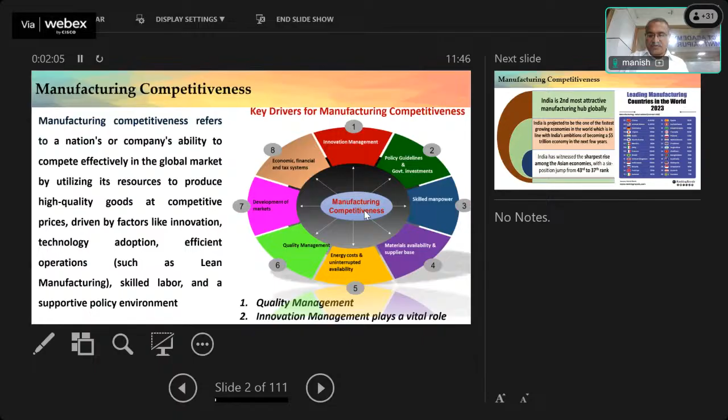A few case studies on where India stands. India is the second most attractive manufacturing hub globally. Among the leading manufacturing countries in the world, India stands fifth. India is projected as one of the fastest growing economies in the world, in line with India's ambitions of becoming a 5 trillion dollar economy in the next few years.

This is the way India has been growing over the last 10 years. Looking at the biggest manufacturing economies, after China, USA, and Japan, India is in the fifth position. So it is one of the greatest, fastest growing economies in the world.

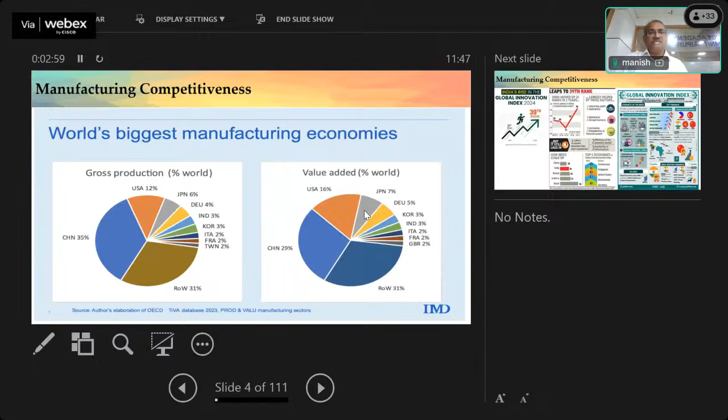Another indicator is the Global Innovation Index (GII). India is now ranked 39th, whereas 7-8 years back it was in the 70s. It has improved over the last 10 years because of the promotion of a lot of startups in the country, moving up to rank 39. The Global Innovation Index is calculated based on parameters shown here: education, number of institutions, infrastructure, market, and everything together affects the global innovation index.

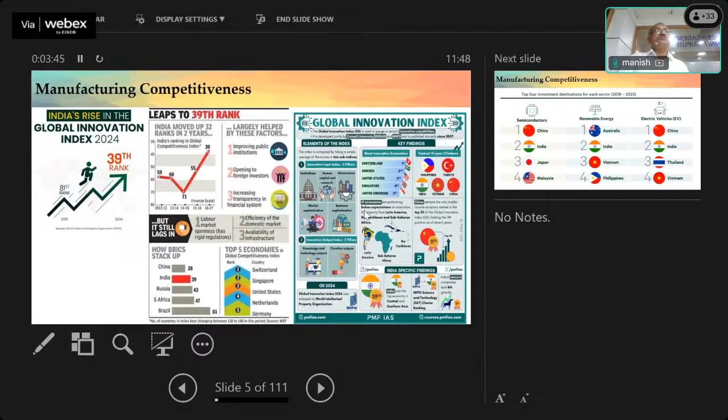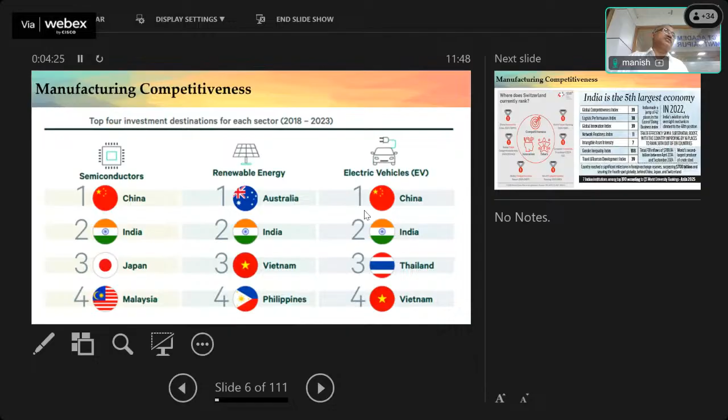India is growing very fast. Among the top four destinations in the world from 2018 to 23 for investment, in fields like semiconductors, India stands second - people want to invest in India's semiconductor field due to its growth rate. In renewable energies, India is second, and in electrical vehicles also India is second. This shows the manufacturing competitiveness of India over the last 10-15 years.

India is the fifth largest economy. Its global competitive index is 39, logistic performance index is 38, and innovation index is again 39. With all these indexes and indicators, India is the fifth largest economy in the world. With these few words, now let's look at how to improve manufacturing competitiveness in the country.

There are a few strategies which have been projected to improve manufacturing competitiveness in Indian MSMEs through smart manufacturing. Smart manufacturing is the use of modern digital manufacturing tools. Robust manufacturing is slightly different, it is capable to handle uncertainties. Advanced manufacturing uses state-of-art machine tools and processes, and innovative manufacturing uses innovation in manufacturing, bringing things first into the market.

So for innovative manufacturing, I have one slide which I worked on personally, one of the drives India has taken on how to improve innovation in the country. A lot of things have happened. I will tell some case studies which have happened recently on how to promote innovation in the country. One is the startups which are coming.

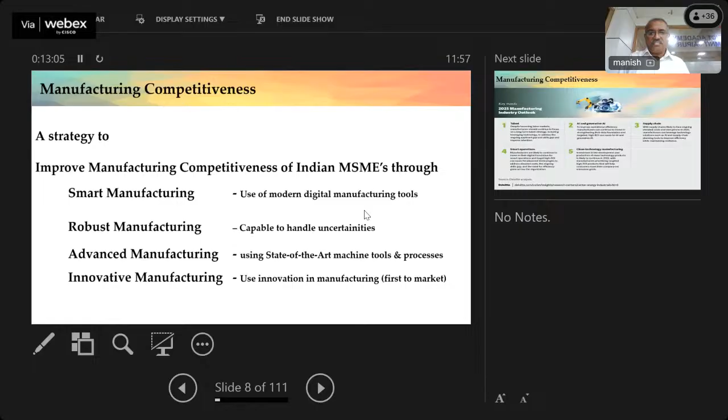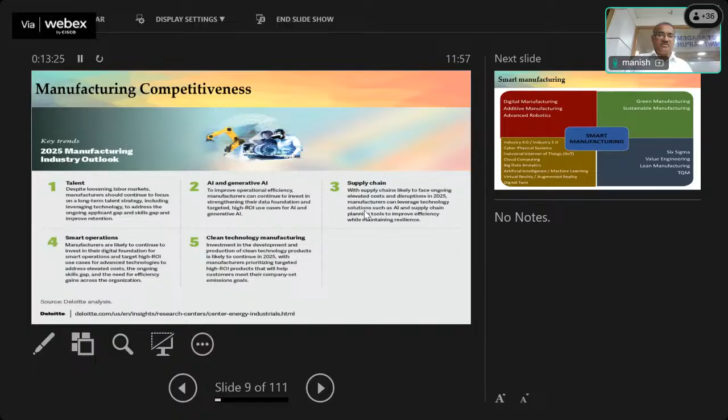So the manufacturing industry outlook shows the key trends in manufacturing competitiveness for 2025: talent, AI and generative AI, clean technologies, smart operations, and supply chain. These are the main areas which need to be focused on for smart manufacturing.

So now coming to smart manufacturing - what is it? It has several domains. Starting from the left side: digital manufacturing, use of robotics, and coming to green manufacturing - it should be green, sustainable, using Six Sigma concepts, value engineering, lean manufacturing, total quality management. Coming to the other side, Industry 4.0.

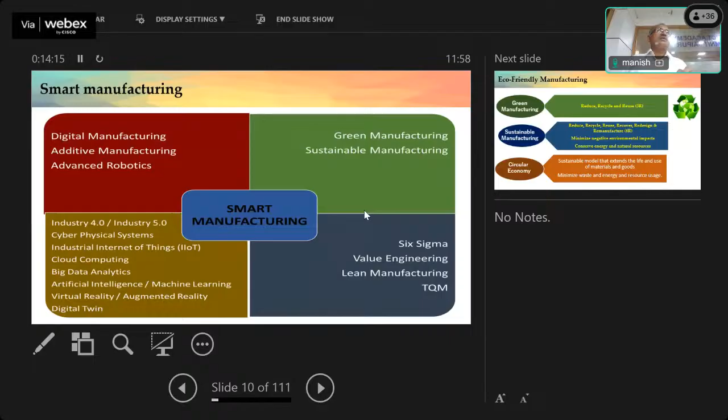Many have been aware that Industry 5.0 is also coming - cyber physical systems, industrial Internet of Things, cloud computing, big data analytics, artificial intelligence, machine learning, virtual reality, augmented reality, digital twin. All these buzzwords come together to make manufacturing smart.

Okay, let's see a glimpse of all these technologies. Green manufacturing has three R's: reduce, recycle, and reuse. The next level is sustainable manufacturing, having six R's: reduce, recycle, reuse, recover, redesign, and remanufacture. That is sustainable manufacturing.

The circular economy is the next level, where we take back materials so that no waste goes out. Maybe batteries - you might have seen in some centers you have to put back old batteries into the same center. Nokia previously had this, where you give back the thing so it goes for recycling. That is called circular economy.

So green manufacturing is a commitment to use fewer environmental pollutants and natural resources. Green facilities also make every effort to produce less waste and carbon emissions, and try to have as little impact on the environment as possible. So somebody can say that additive manufacturing also comes under green manufacturing.

The reason is that the waste is less. Considering that the waste is less and the energy is less - considering those two points, additive manufacturing comes under green manufacturing. There are some technologies like flow forming, where the material is formed instead of machined. Such technologies also come under green manufacturing, where we want to reduce cost, reduce time, and improve productivity.

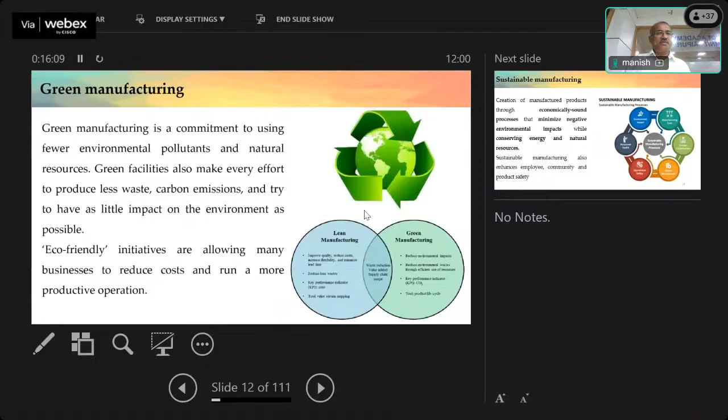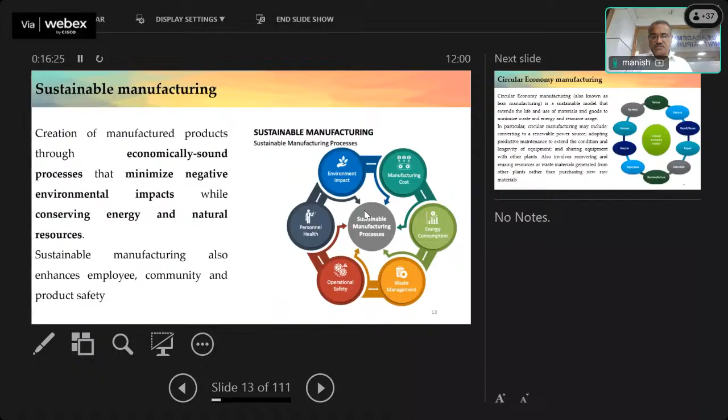Sustainable manufacturing, as I told, is an economically sound process that minimizes negative environmental impacts while conserving energy and natural resources - that is called sustainable. It is one step ahead of green manufacturing. Circular economy uses a sustainable model that extends the life of use of materials and goods to minimize waste, so it involves recycling and that type of activities.

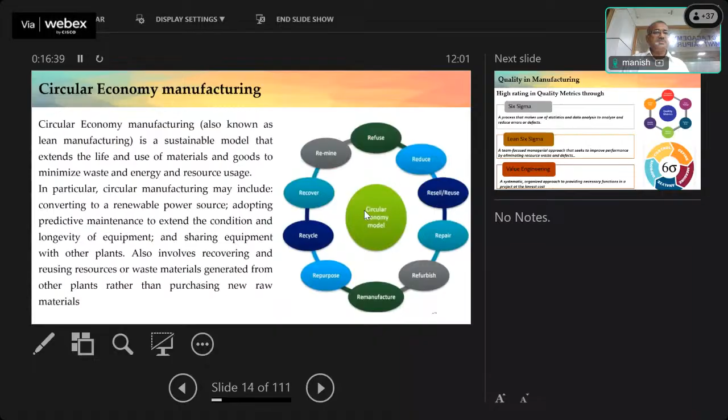Coming to quality in manufacturing, the next block is Six Sigma. Maybe everybody knows about Six Sigma. It is a concept as well as a direction of removing waste and bringing all process control within limits. It's a process that makes use of statistics and data analysis to analyze and reduce errors or defects. Lean Six Sigma is a team-focused managerial approach that seeks to improve performance by eliminating resource waste and defects. The third part is value engineering.

Value engineering is a systematic, organized approach to provide necessary functions in a project at a lower cost. So we can see a little bit about these things. Six Sigma is a multi-dimensional structured approach: improving processes, lowering defects, reducing process variability, reducing costs, increasing customer satisfaction, and increasing profits.

So it is a philosophy as well as a methodology. Lean Six Sigma is a management philosophy - Six Sigma plus Lean. Value engineering can be defined as an organized effort directed at analyzing a designed building's features, systems, equipment, and material selections for the purpose of achieving essential functions at the lowest life cycle cost.

Value analysis - you may be aware of value engineering. No? So it is function by cost. Function should be more, cost should be less. There is one concept called DMAIC: define, measure, analyze, improve, and control. These concepts are used in value engineering to improve the functionality of the component.

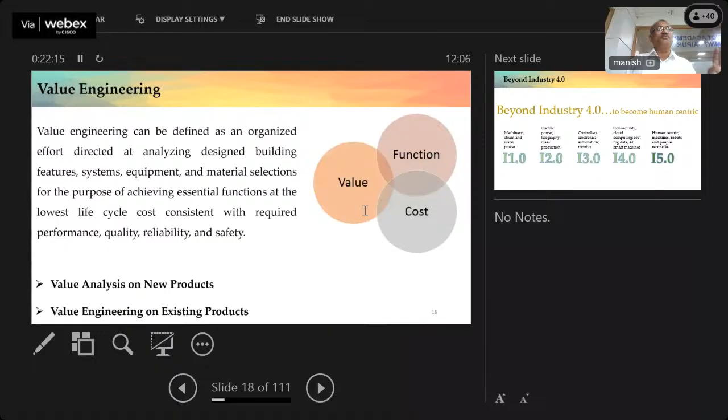Okay, coming to Industry 4.0. It is something like 1.0, 2.0, and the changes that have happened up to 4.0, which is like computing, IoT, big data, AI, and smart machines. All this comes under 4.0. Then it is extended to 5.0, where human-centric machines, robots, and people reconcile, adding to 4.0 and going beyond it.

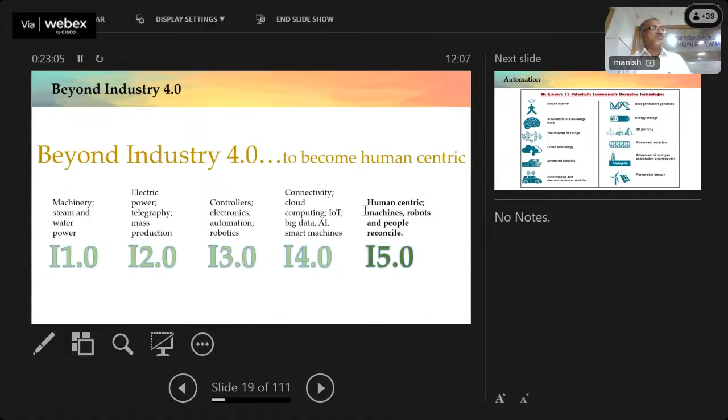It is not only automation, only robots will work. Intelligence is being shared by human as well as robot, so they are also working on par with humans. So these are the technologies.

As I told, this is a McKinsey report from 2012 or 13, where these technologies are listed as disruptive technologies. If you see mobile internet, you can see how much change has happened in signal, 3G, 4G, 5G, and automation of knowledge work, Internet of Things, cloud technology, advanced robotics, autonomous and near autonomous vehicles. The other side is energy storage, batteries, next generation genomics, 3D printing, advanced materials. All these things have come.

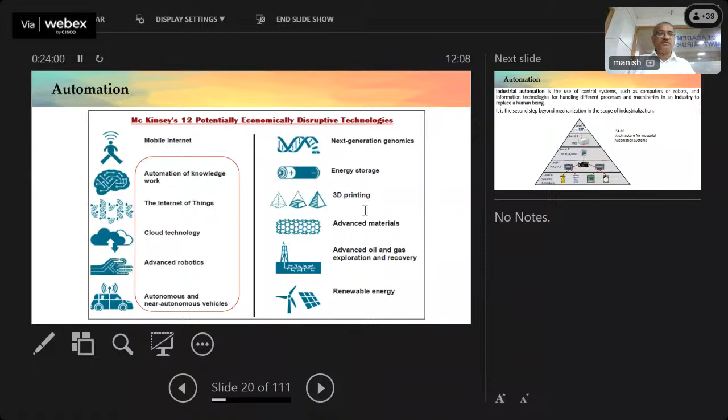So we'll see a little about automation and other things, then we go into 3D printing. Industrial automation is use of control system, computers, robots, and information technologies for handling different processes or machineries in an industry to replace human labor.

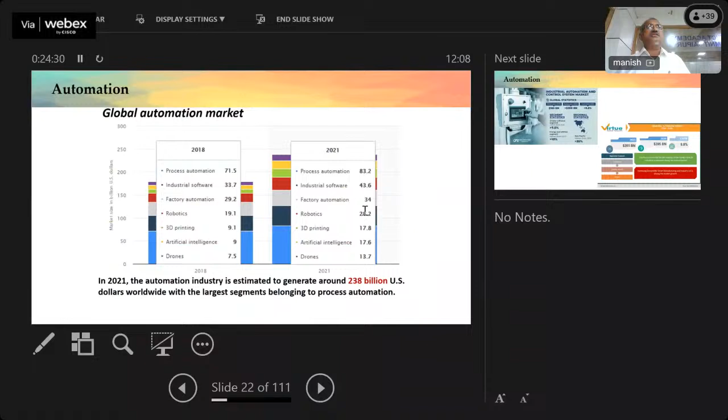If you see the global automation market, the automation industry is estimated to generate around 238 billion US dollars worldwide, with the largest segment belonging to process automation, one of the major industries making use of automation. The market for automation is growing very fast, at a CAGR of 9.8%. Indian industrial automation is also growing very fast, as the data shows.

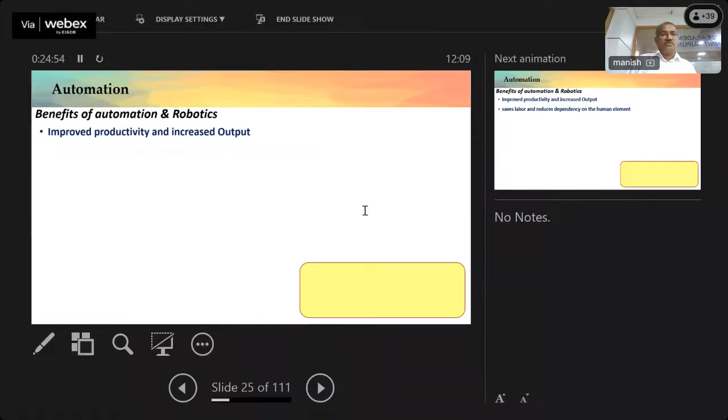So what are the benefits of automation and robotics? It will improve productivity and increase output, save labor and reduce dependency, save energy and materials, improve quality and accuracy, speed up time to market, and keep business competitive with others. It helps to keep pace with order demand, improves safety, reduces work weeks for labor, reduces factory lead times, and offers many opportunities.

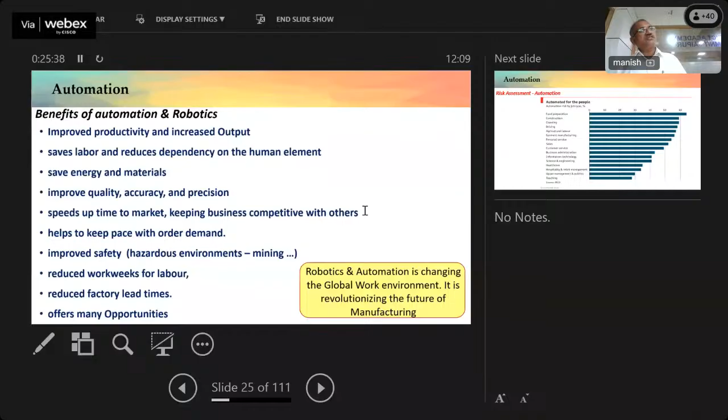Globally, robotics and automation are changing the global work environment, revolutionizing the future of manufacturing. So what is the risk assessment? Because of this robotics, where will people get affected? Let's see this slide.

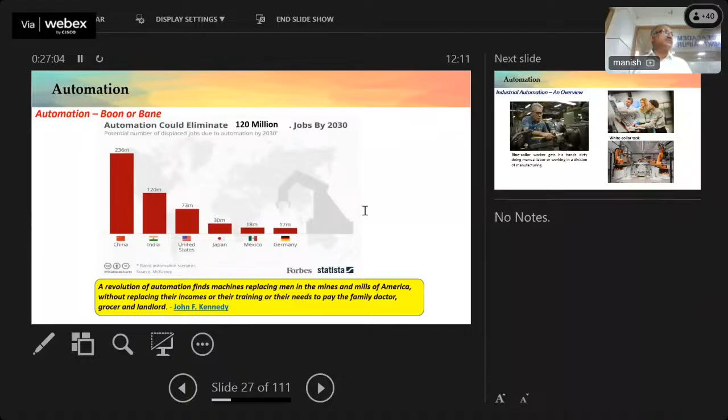So is automation a boon or a bane? Automation could eliminate 120 million jobs by 2030. As John F. Kennedy said, the revolution of automation finds machines replacing men in the mines and mills of America without replacing their incomes, or their training, or their needs to pay the family doctor, grocer, and landlord. So it is replacing a lot of human beings with automatic systems.

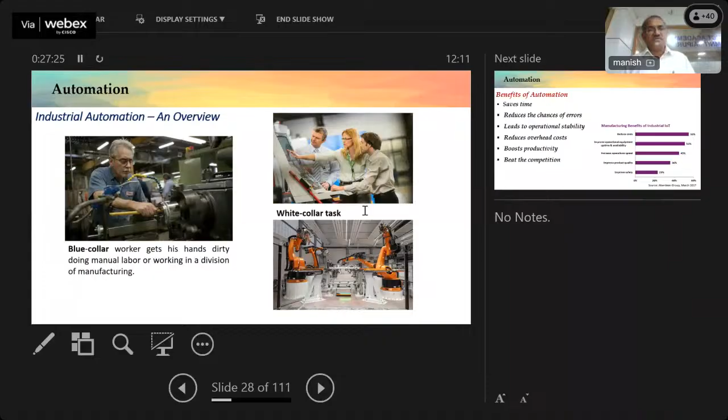But what we got—on the left side, a blue collar job is now converted into a white collar job. The same work is done by robotics, and people become white collar workers, working on systems. They say this is to be done, and it will be done by the robotics. So that is the advantage we get.

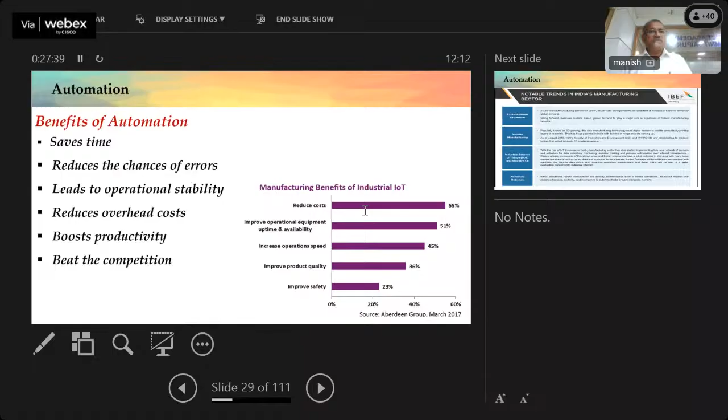It is like a hub and spoke model, similar to DRDO Industry Academia collaboration. Hub and spoke model means, for example, MNIT wants to have some expertise in some area, but a major project is proposed by one institute, and that becomes the hub institute. The spoke is MNIT can be one of, say, 10 institutes involved in one single project. Previously, what happened was one institute would take a project, whatever capability they had, they would do that and close the project.

So they would take only the area in which they had expertise. They would take the project, whichever level they were capable of, do it, and close the project. Now it is not like that, it is hub and spoke. So wherever the talent is there, it will be brought together and it works in a collaborative mode for the final product.

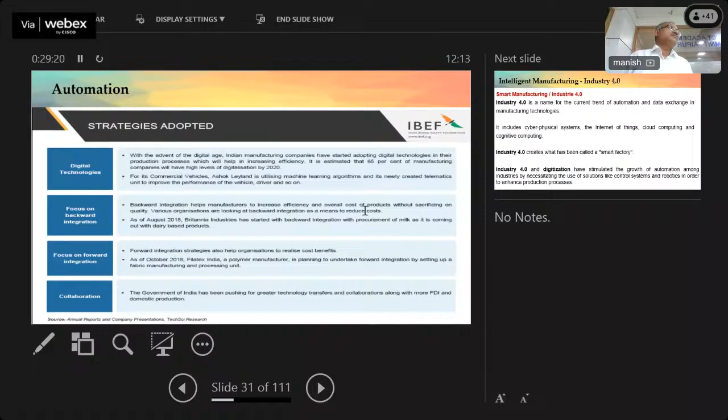So coming to intelligent manufacturing, it is again smart manufacturing, all this Industry 4.0 and everything. Industry 4.0 is the current trend of automation and data exchange in manufacturing technologies. It includes cyber physical systems, Internet of Things, cloud computing, and cognitive computing. Industry 4.0 and digitization have stimulated the growth of automation among industries and so on.

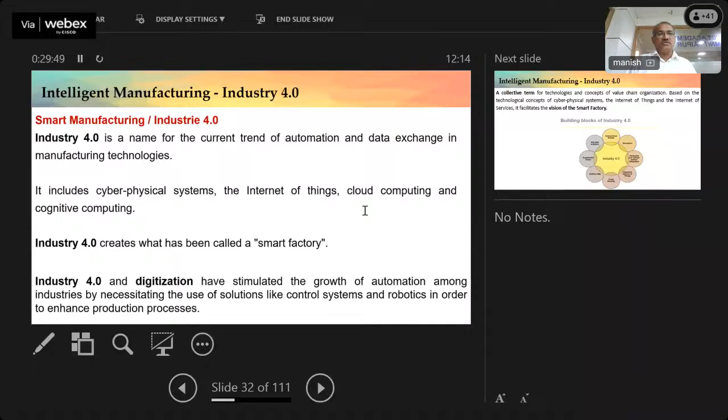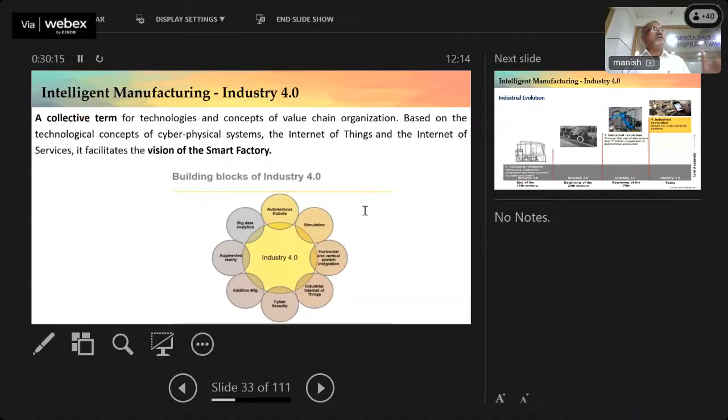So this is the same Industry 4.0. The enabling technologies for 4.0, and you can see that augmented reality is being used in a lot of areas. We even started working on augmented reality in some areas where we can train people with HoloLens type of things, where they can be assisted.

For example, the training process will be assisted along with doing that work. Say, for example, he has to pick something up - the assisted training, the HoloLens, will say go and pick, then it will say you have picked it. So it is like an interactive mode, it will be working. That is like augmented reality.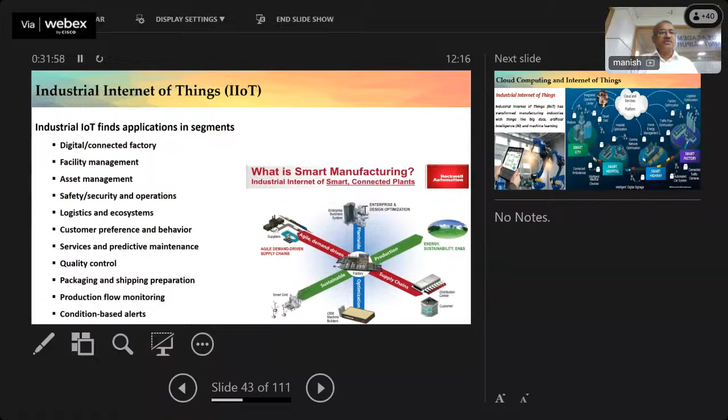So the data is being used. Cloud computing - all the information is stored in a cloud. So we get all the data needed from the cloud. It's like smart city, smart hospital, smart highway, smart factory - all these concepts are being evolved. I think now it is being used in so many places. With all the data available in the cloud, it can be taken and used for manufacturing.

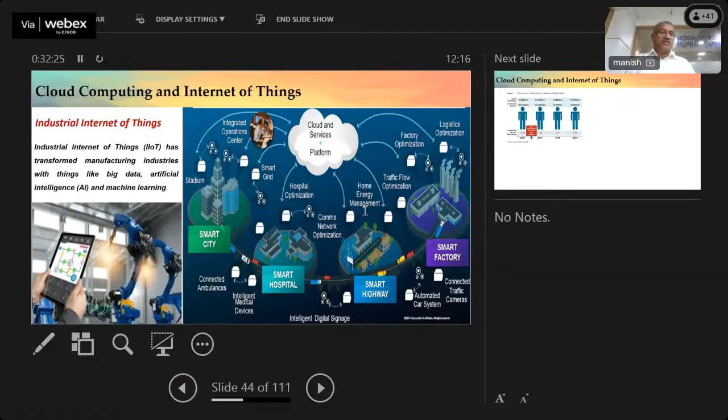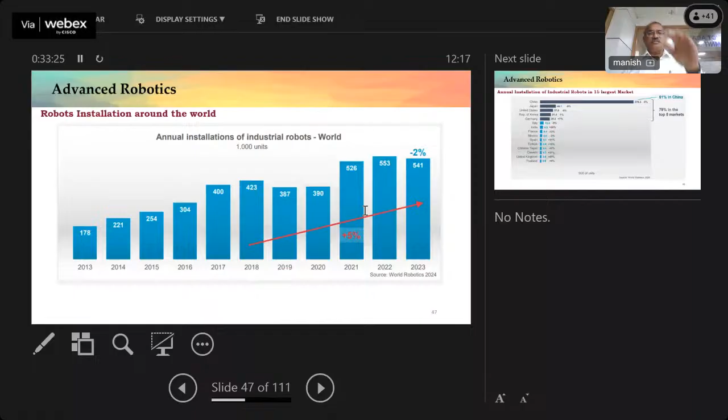Annual installation of robots in 15 major markets. Previously, some 5 years back when I took this data, India was not in the list, but now India has come into the list.

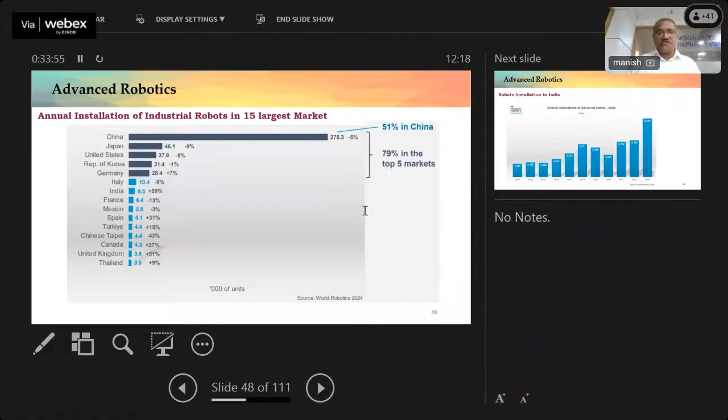This shows the robotic installations in India also. 8,510 robotic installations are there in the country, now in the seventh position, with annual installation improving in India in robotics.

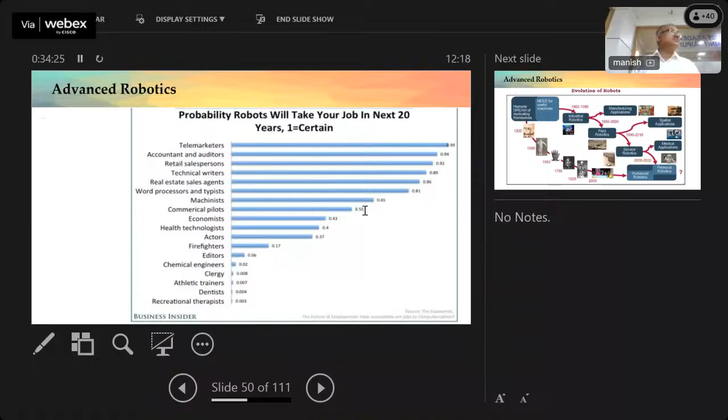So where will robots be used in the next 20 years? It is said that telemarketers, accountant auditors, retail salespersons, technical writers, real estate sales agents, machinists, and so on—all these areas have a tendency for robot use.

Some areas where this shows up in industrial applications: aerospace, drones is one of the major areas. In the last Operation Sindoor, you might have seen how drones are very much used, showing how robotics has played a major role. If you go to any big institute, they have their own drone lab separately where people are working on drones. That is the trend you can see in any education institution.

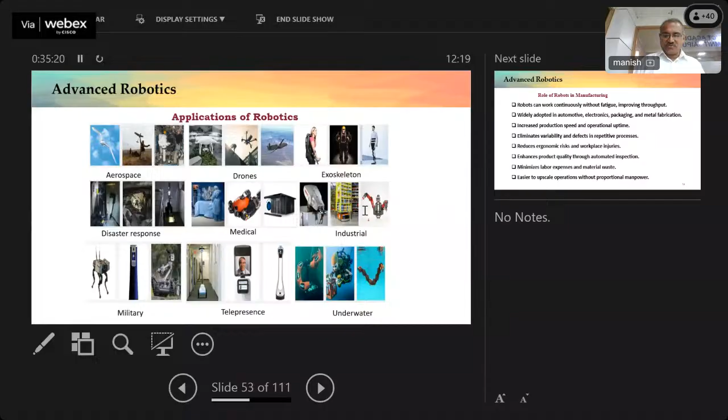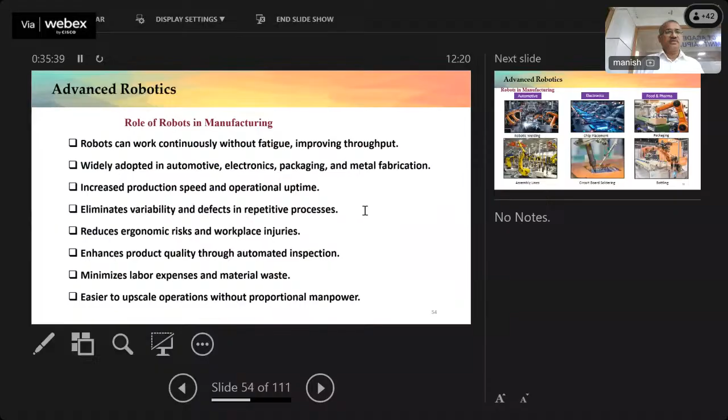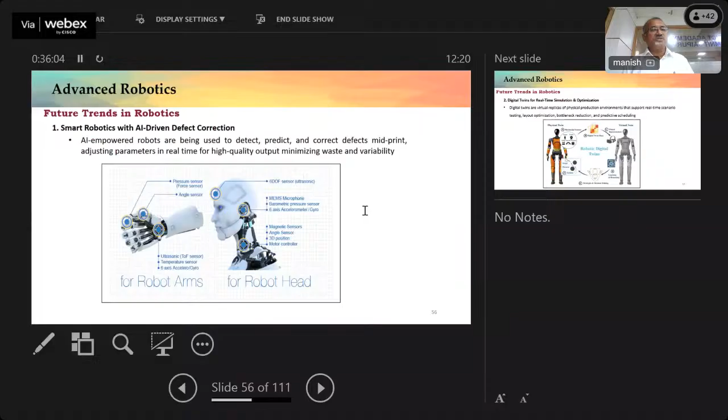The future trends in robotics include a few areas: smart robotics and AI-driven defect correction, so if any defect occurs in welding or something, smart robotics is used for correction. Digital twins for real-time simulation and optimization—we can make a digital twin of a robot, simulate it, and then implement it. Also, fully autonomous mobile 3D printing factories.

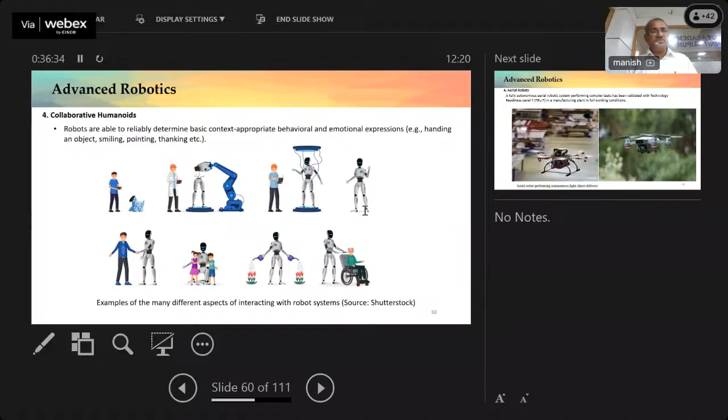Robots are being used in locomotion, and collaborative humanoids are working with humans—that is one of the great advantages of these smart robots. And again, drones, aerial robots.

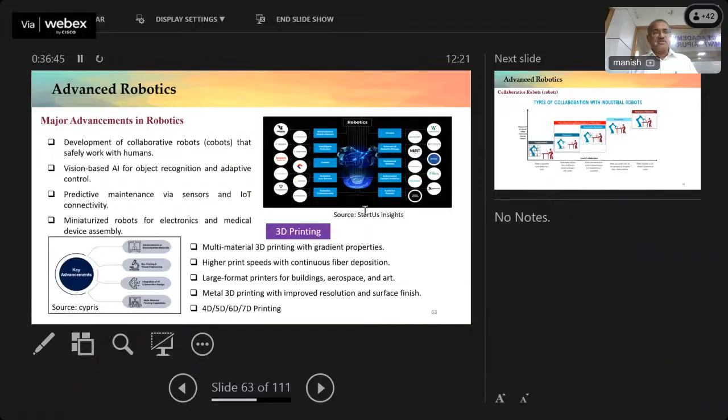This is the major advancements in robotics. Collaborative robots is one of the major things being used in industrial robots. So you can see global trends in robotics: AI and machine learning, collaborative robots in new applications, mobile manipulators, digital twins, and humanoids. Humanoids is the next generation thing.

So collaborative—nowadays all these measurements are being done with collaborative robots. It's assistive, so we can move the arm, and it will keep on taking the data.

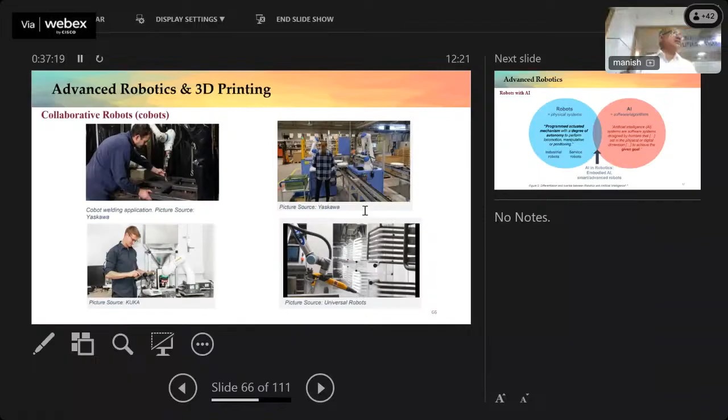Sir, how is this robot different from the traditional robot? No, it is collaborative—two robots will be used, because the work will be done by two robots. It's a collaborative mode: if there's one big beam and I want to lift it, I cannot lift it with one robot, so I use two robots. One robot should not go fast, and one should not be slow. It should be able to communicate with the other robot about how it is lifting, and then only it will be moved up.

Otherwise, the same way collaborative robots are used for different applications like measurements and welding. For example, in automobile industries, welding is done with collaborative robots—one side has one or two robots, the other side has other robots. Both should not go to the same place and collide, so they communicate with each other.

So basically, for mass production, if one robot is not possible, it works in a collaboration mode. The working scheme should also be in collaborative mode—the complete work cell should be in collaborative mode. All the robots should not just be blind robots going somewhere and colliding with another robot. It should be able to understand what is my distance, what is his distance.

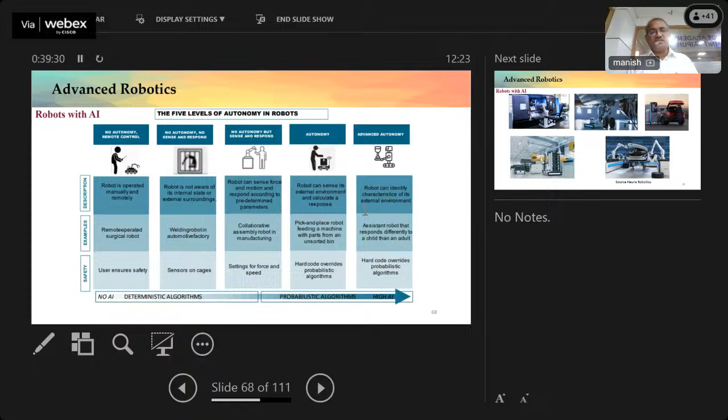So artificial intelligence plays a very important role in robotics. It is about how the control in robots works - no autonomy with remote control with human beings, no autonomy with no sensing, and no autonomy but some sensing, like it touches something, senses it is touched, and stops. And there is fully autonomy and advanced autonomy. So these are the types of generations in robots.

Robots are being used in several applications. Amazon is one of the major users of robotics.

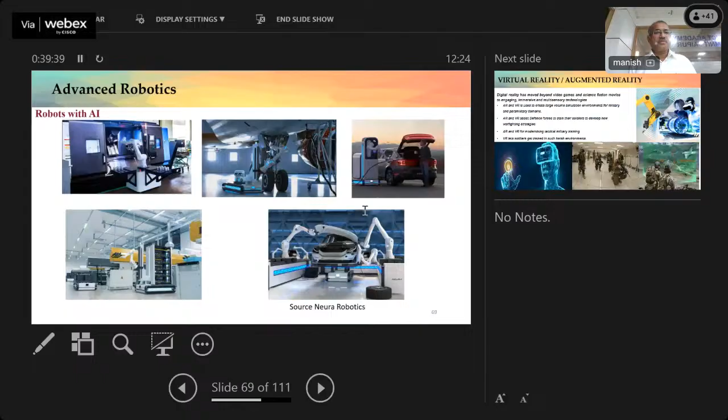And coming to virtual reality and augmented reality - you may be aware of these two differences, virtual and augmented reality.

So children will be playing, and they are putting maybe virtual reality tools, but it is not going to affect anything physically. So that is virtual reality versus augmented reality.

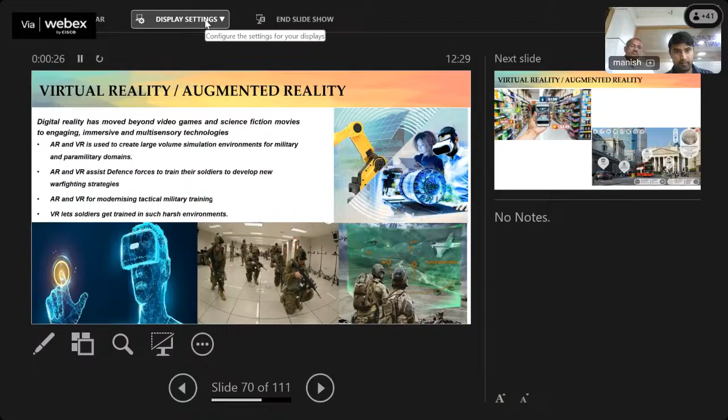There seems to be some technical issue with the screen sharing - the full screen is not visible online, so that's why there's a delay while they fix it.

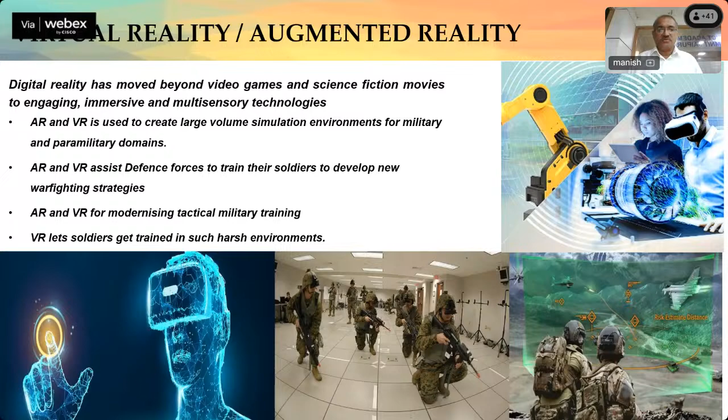So let's see about virtual reality and augmented reality. Both are used very widely in training for service people. What are the services, how are they getting trained? It is one of the very important tools being used. When I prepared this slide some 10 years back, this information was new to us, but now if you go into any mall and scan the code, you get the complete details of the product. Even now, using Google Lens and similar tools, if you show a product, it will show the cost and everything about it. So that is virtual and augmented reality type of things.

So industries expected to face the most disruption by immersive technologies - that's what these are called. We can see healthcare and medical devices as a major area. These immersive technologies are used widely in education, workforce development and training, services, manufacturing, automotive, marketing and advertising, and so many other areas. Healthcare and medical devices is one of the major areas.

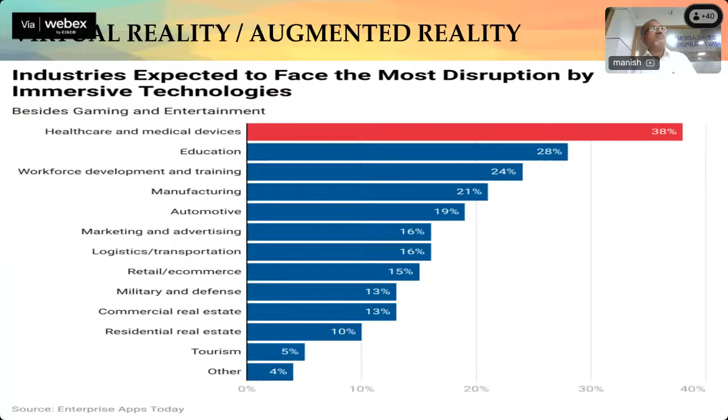So if you say anything about artificial intelligence, deep learning, machine learning - these buzzwords are now being used in all institutions. Where are we getting the data? Data is one of the most important things in any artificial intelligence. How we generate data, the correctness of data - all these things play a very important role. If you're making a model, it should work based on the data available with you. If the data is good, it will work fine. If data is bad, the complete thing goes off.

So digital twin is a virtual representation of a physical object, structure, or system that incorporates real-time data from the entity that it represents. Digital twin can be used to analyze performance, conduct simulations, and identify potential problems with their physical counterparts.

Previously, whatever we wanted to do, we only did simulation. That was the only tool to represent a complete physical system. Sometimes when multiple domains are involved, simulation is not able to handle such things - though co-domain simulations exist, they can only take one or two domains, not many. But when it comes to digital twin, it takes all the things - many things can be integrated together. So it is a complete virtual representation of a physical object.

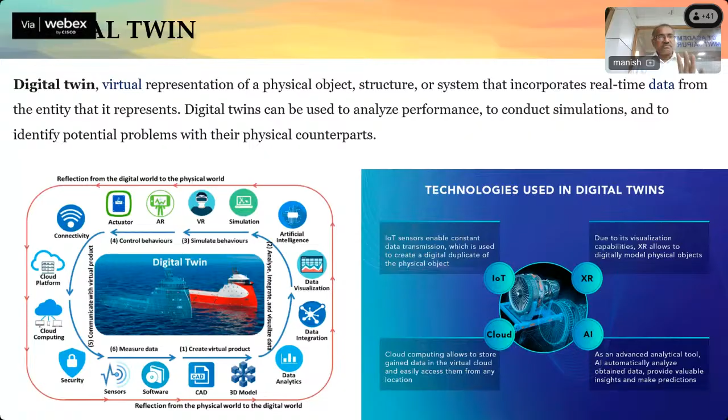So complete all the things like it will have sensors, computing, cloud computing, virtual reality, visualization capabilities, and all analytics, artificial intelligence, all integrated together.

So robust manufacturing, I told in the beginning, it is able to handle uncertainties. For example, processing times, equipment failures, repairs, government investments, product demand, and so many things affect that one. So how is the manufacturing robust? The selection of processes is important. We have to select the process such a way that it is robust.

Say, for example, I'm coming with a new technology which is not proven, and I want to implement it in particular applications. So suddenly if the technology is not able to handle the situation, if numbers are more, it cannot handle the situation, and the complete product cannot come to the market. Completely affected, then changing the lines, everything is difficult. That's the reason industries will not fund new products or new technologies unless the technologies are proven and matured.

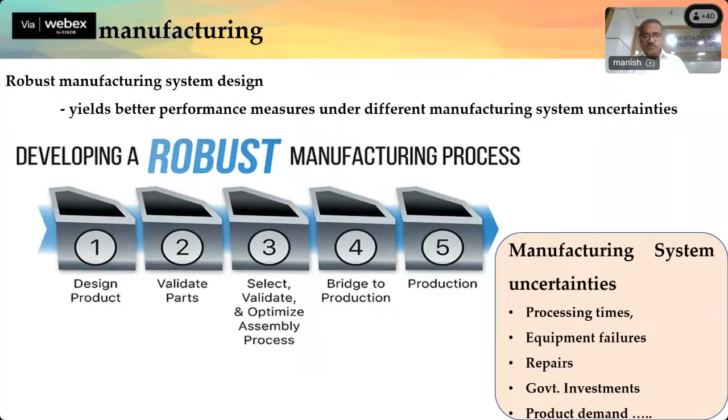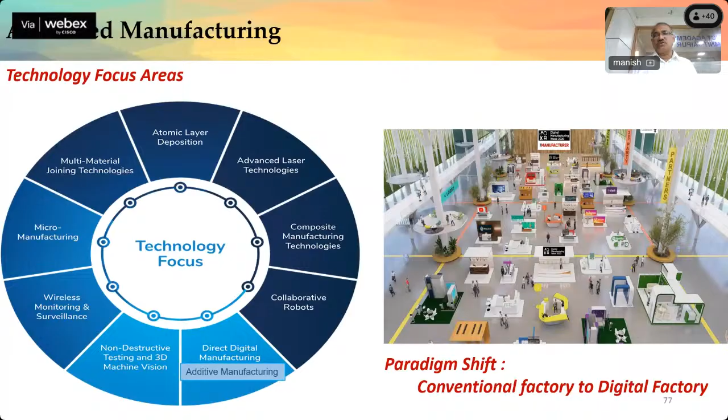So advanced manufacturing, we see that: laser technologies, composite manufacturing, collaborative robots, additive manufacturing, non-destructive testing and 3D machine vision, wireless monitoring surveillance, micro manufacturing, multi-material manufacturing, atomic layer deposition, all these things. It all make a paradigm shift over the last 50 years from conventional factory to digital factory. That is the thing which came in smart manufacturing.

Now just we are entering into additive manufacturing. We see some additive manufacturing technologies. Additive manufacturing is one of the highest growing markets in the last 10 years, growing multiple times. And it is being tried for use in several functional or final applications. Previously, when it wasn't robust, additive manufacturing was not considered a robust manufacturing process, but now people started using it as one of the robust manufacturing processes. That happened in the last 3 to 4 years.

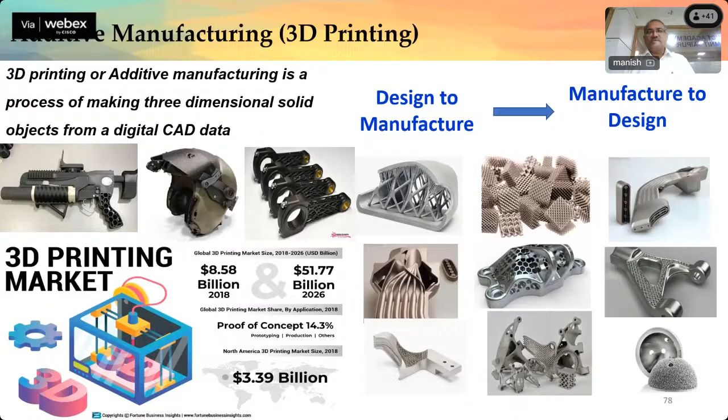So the advantage we get is design to manufacture to design. So any parts we think of, we can able to manufacture.

So these are some case studies where large area additive manufacturing comes into picture. Their machines are custom built machines. World's largest 3D printer, Stargate at Relativity Space, USA. At this point, I will say that in DRDO also there is one largest printer in Asia, which fortunately I was involved in that project. Now we could able to build 2 meter height metallic systems with robotic printing.

So that is Asia's biggest printer. It is getting installed in another month's time, it will be installed at my lab. Like that, we are also building bigger size systems. Large format additive manufacturing is one area where aerospace and defense is focused, because other automobile applications are small components. When it comes to space and defense, large format additive manufacturing is one.

Anyway, you may be knowing all these technologies, the 7 technologies. Here I want to say some certain points: there are a lot of new areas coming out of this additive manufacturing. If we say thermally conductive polymer composites, electromagnetic interference shielding polymer composites, biomedical polymer composites, self-healing polymer composites, responsive polymer composites - these are new areas being done with additive manufacturing with different technologies.

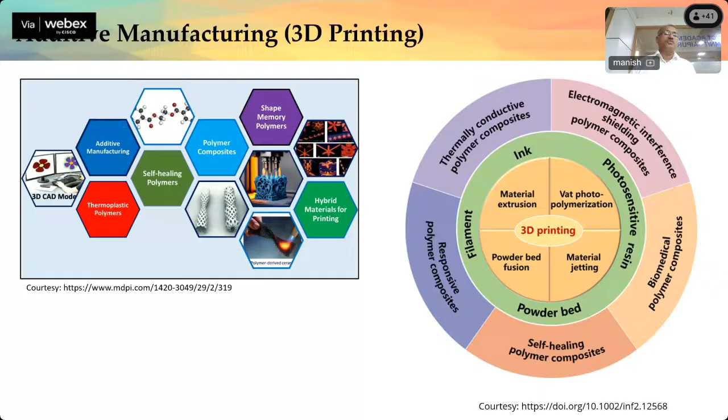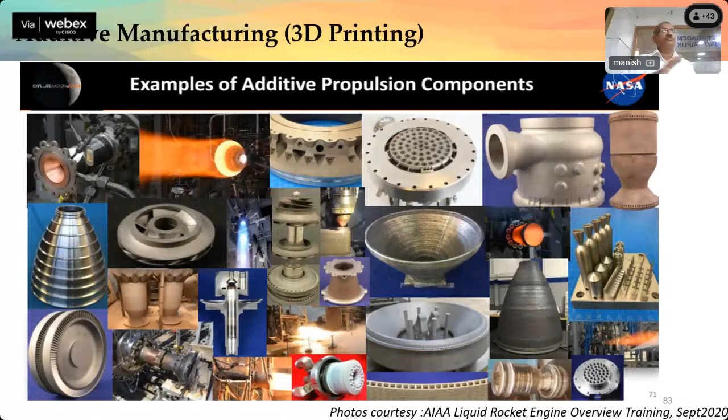I think in April, DRDO released a press note saying that a hypersonic engine of 1,200 seconds was proved and tested. I was involved in that project. That engine was made with the additive manufacturing process. It has a lot of conformal cooling channels and everything, done with additive manufacturing. So India is also progressing very well in additive manufacturing.

These are some of the other things being used in additive manufacturing. Multi-material printing - the beauty of this is that the outside shell will be one material, inside shell will be another material. I think some people are working in this area in MNIT. For example, the outer could be Inconel material, which has high thermal properties, and internally there will be a copper liner.

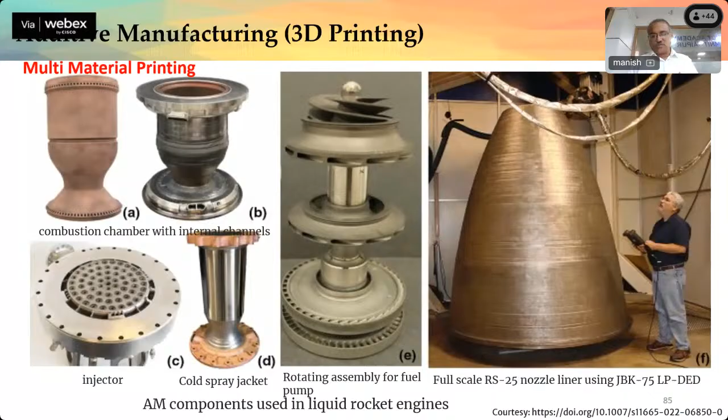So we are also working on some methodology for multi-materials, because the material properties will be different. It is a very technology-intensive area to work on. 4D printing is another important area where the fourth dimension may be like time or temperature, used in smart materials printing. So smart materials are being used for additive manufacturing.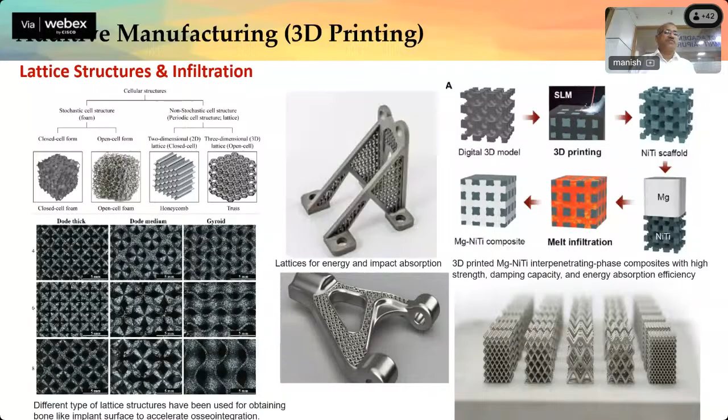Another area is lattice structures and infiltration. Additive manufacturing can make lattice structures, as everybody may know. In these lattice structures, we infiltrate with some type of polymers or soft alloys, so that we can change the complete vibration signature of these structures, depending on the polymers used. You can completely change it - whenever you want damping to happen in particular frequencies, we can tune it such that we put certain polymers into it, so that I have frequency damping in a particular zone. That is the beauty of having this type of structure.

Propellant printing - propellant itself can be printed for small ammunitions and that type of things. Previously it used to be casted, but now it can be printed. That is one of the areas.

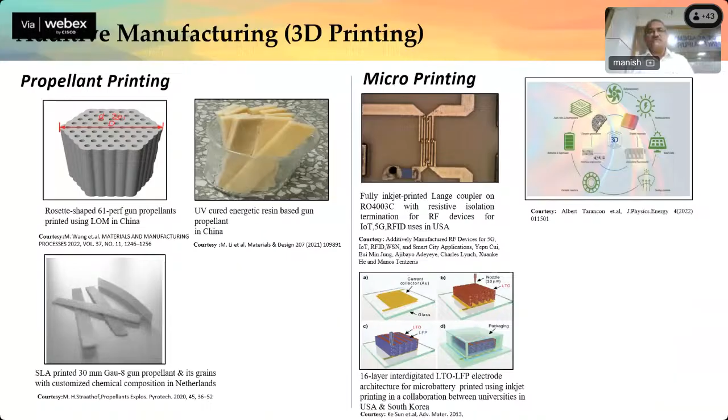Micro printing is another area where additive manufacturing is very widely used. People used to think additive manufacturing features are very big and thick, but now we can make small features, like in tens of microns. So additive manufacturing is in most mobile devices - the antennas, patch antennas, are made with additive manufacturing. Apart from that, it is being used in implants and prosthetics.

In prosthetics, in June - first week actually - we developed one prosthetic leg, a prosthetic foot, for All India Institute of Medical Sciences. It was published in newspapers, everything. That is a prosthetic foot which has a lot of additive manufacturing inside it. The cost of the imported thing is 2 lakhs, and it has reduced to 15,000 rupees. It's indigenously developed, designed in DRDO, and the first prototype was printed in my lab.

So it was released. It is being used in prosthetics, bioprinting, some 3D printed garments, and embedded electronics. In garments, there will be a lot of electronic things. When a soldier is walking in sunlight, it will get charged, and at night he can use that charge for his mobile or some communication systems. So 3D printed garments is one of the areas.

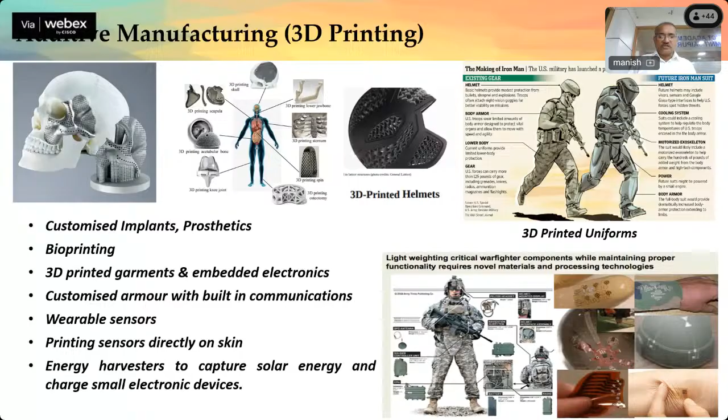Customized armor with built-in communications, wearable sensors - one lab in IIT Kanpur is working on flexible electronics, wearable sensors, printing sensors directly on the skin, and energy harvesters to capture solar energy for small electronic devices. In defense applications, there are a lot of things: high entropy materials, functionally graded materials, high temperature materials, and artificial intelligence and smart materials. So these are some of the applications of additive manufacturing in defense.

Some areas used in smart manufacturing include advanced materials, like biomimetic materials. Nowadays car windshields are coming which can be self-healing. If you have a crack, it heals on its own and the crack will not propagate. These self-healing materials have polymerized healing agents in between, which when open to atmosphere close the crack so it doesn't propagate further.

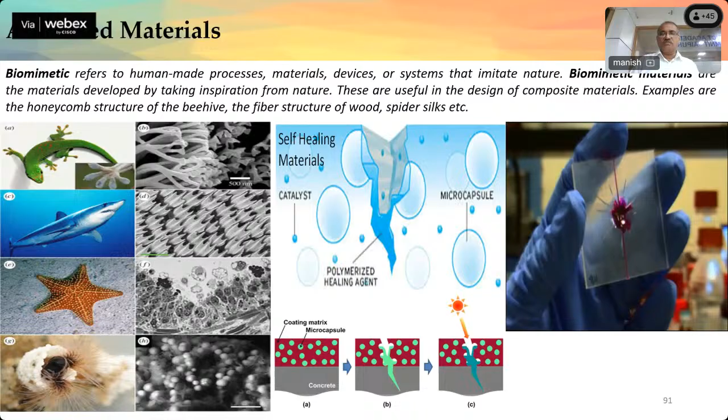There are also some joining technologies. Cold metal transfer is another additive manufacturing technology. It's a joining technology where metal is transferred in a controlled manner.

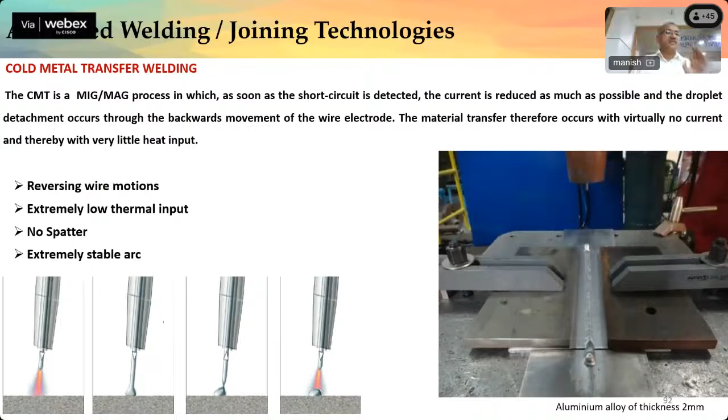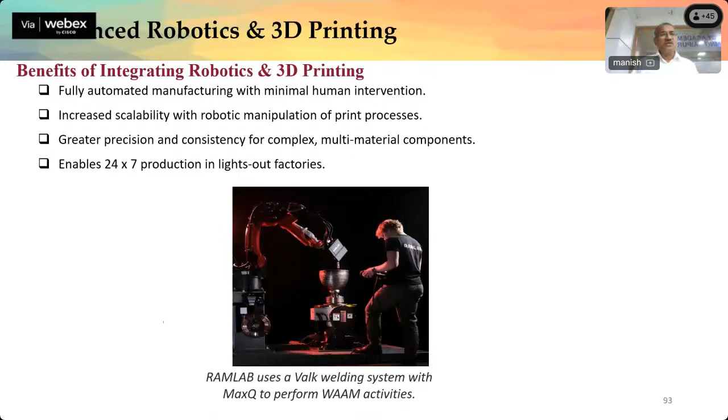These are some areas integrating robotics with 3D printing, like big print or large format printing. We also started working in this area. It's coming into printing with robotics, where robots are used for printing some parts, and delta parallel robot based 3D printers are printing some objects.

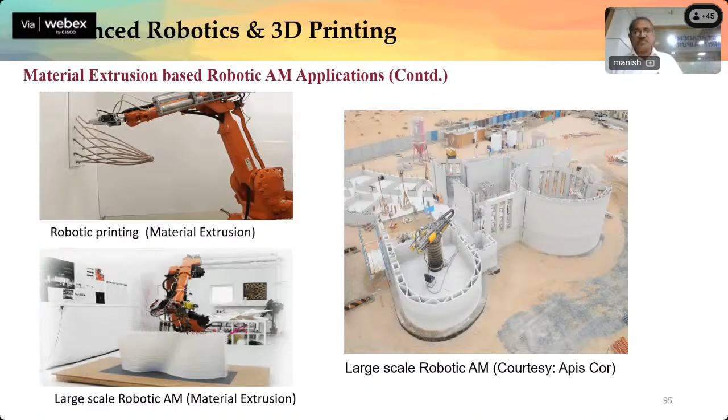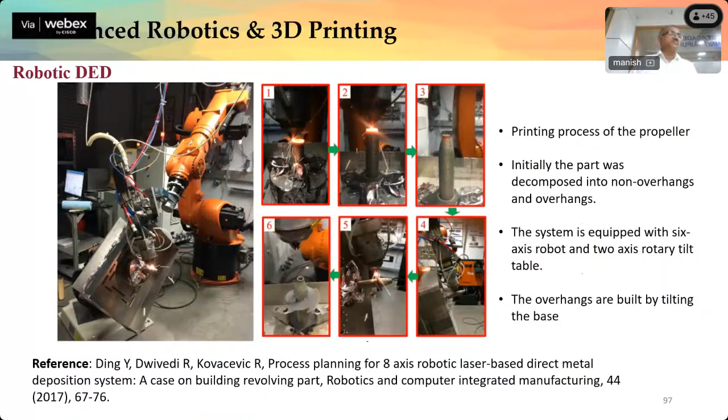These are deposition-based additive manufacturing technologies and robotic DED. I mentioned this 2 meter engine component was done based on a DED process, with structures made using a robotic arm.

This is multi-axis printing or robotic printing, a hybrid system. In these machines we can do both printing and machining. Whenever we do printing we may not get a good finish, so then we follow with machining.

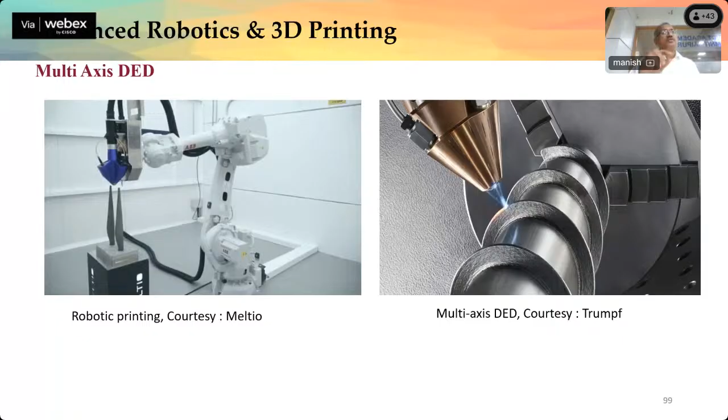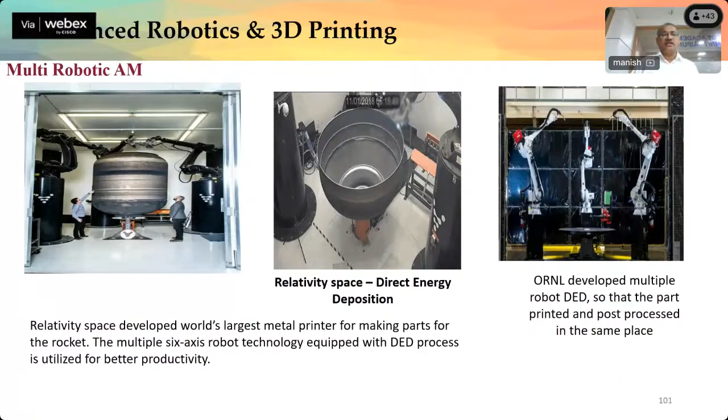Multi-robot concurrent printing can be done with multiple collaborative robots. Relativity Space is making big rocket motors with additive manufacturing, which I understand they did with aluminum. We are working on doing this with Inconel material itself, using direct energy deposition based additive manufacturing.

This is a robot which we have developed as part of a project. It prints composite materials, continuous composite materials, and is the biggest robot in the country for making 3D composite materials. It has a size of 2 meter by 2 meter by 2 meter. This frustum, 1 meter height with a diameter of 70 mm, was made with this robot.

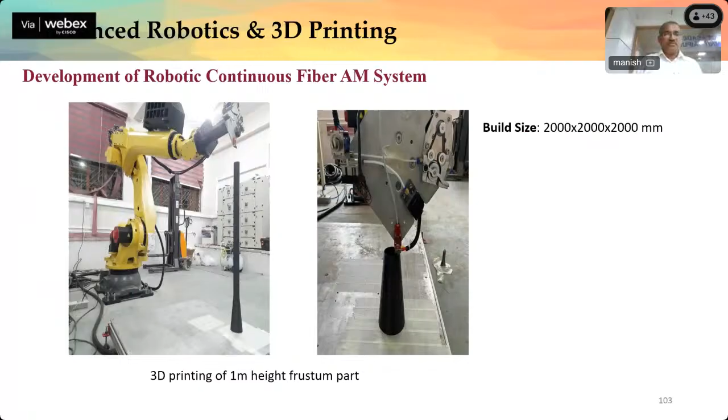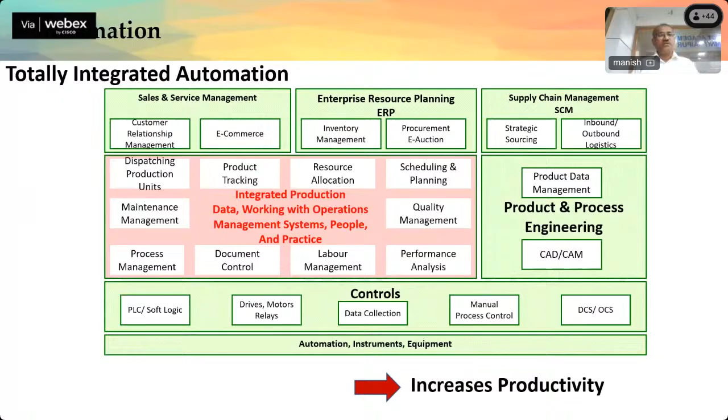This robot is also going to come to our facility in another 6 months. This robot system was completely developed in our Indian Atmanirbhar Bharat initiative. This is totally integrated automation — not only is the machining process automated, but complete scheduling, e-commerce, everything should be automated to get a smart factory.

When I visited abroad in 2013, one person asked to go to a particular location. He came to the reception and told them the place he wanted to go. He shared that place with the driver, who took him there, but actually his room was on the back side of the same hotel. So he walked to the front, took the vehicle, and came back to the back side of his own room. He said that's not the place he was supposed to go, but then he got dropped there and realized that was actually the place shown. People don't always know where it is — it's based completely on GPS location. Now it's already common in India. At the time it was astonishing for me, how they were depending entirely on these systems.

At the time, people were saying that in Japan, if a person was not able to go home, he'd say the GPS system is down, so he could not find the way home. That situation is here in India today too. A new person coming to any place cannot reach the destination without knowing the GPS location. When I started 10 years back, it was astonishing that people don't know how to go home without it, but now it is happening in India itself. That is GPS based location identification.